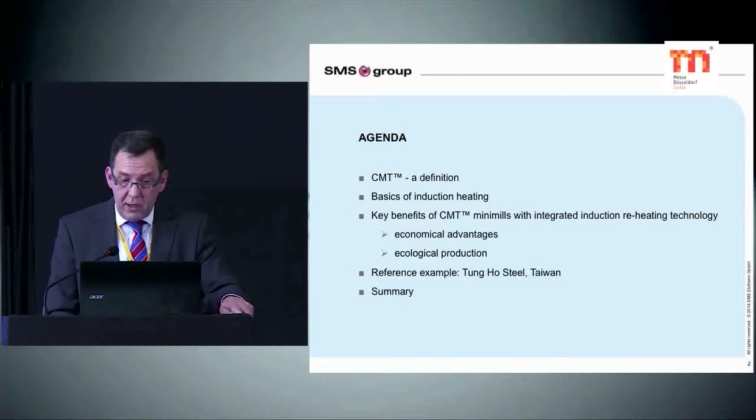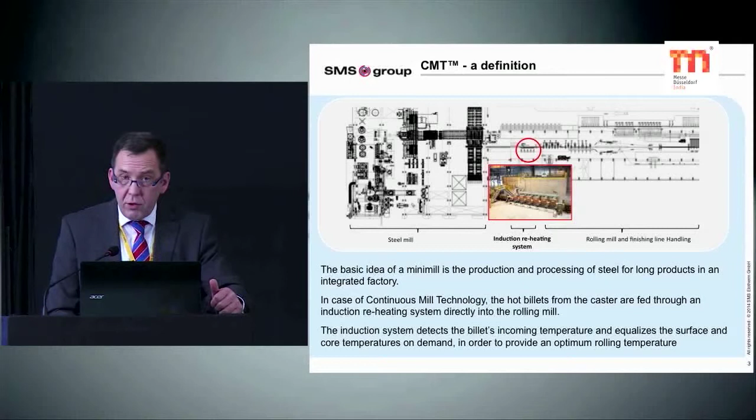So we have 6 euro cents per kilowatt hour for electricity in our case here, and 5 euro cents for natural gas per kilowatt hour. And we determined the rolling temperature at 1000 degrees centigrade, and that brings us energy cost savings of 3.5 euros per ton of the final product. But that is not the only effect.

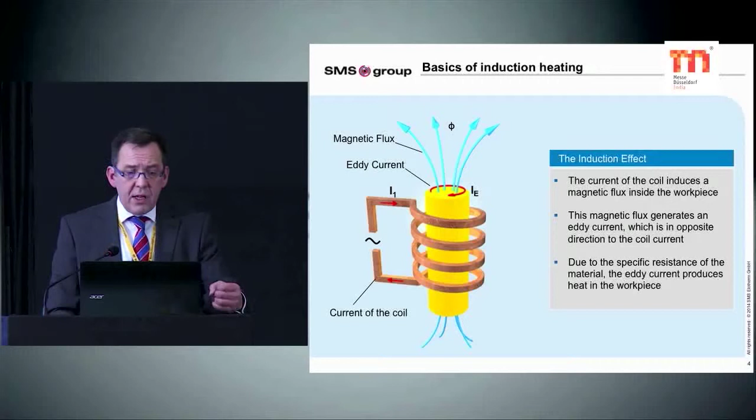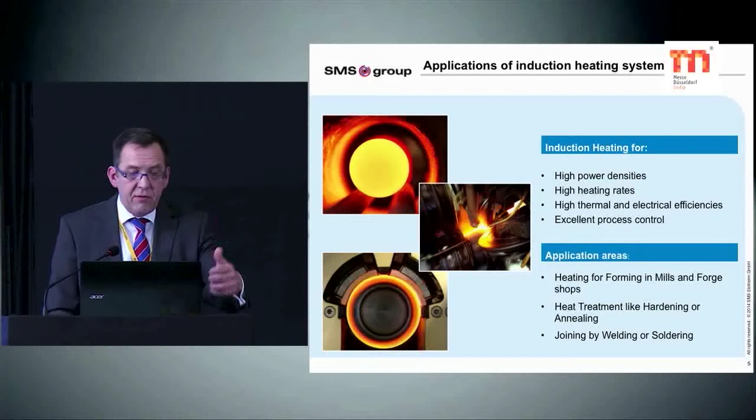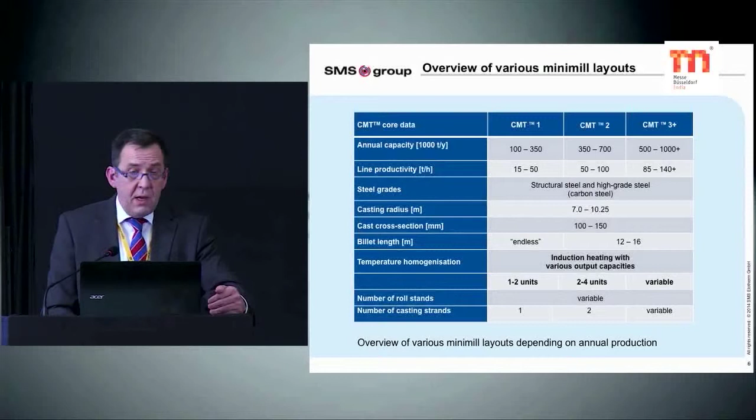We have another effect, which is a production increase, because with virtually no scale formation, don't take it precisely, there is always a little bit of scale formation, but substantially less compared to the combustion furnace. So that's why I said here virtually no scale formation. And we have here a number, a 0.6% increase of production just by the reduction of scale formation. Which means there is less scale, there is a higher input and higher output of your production.

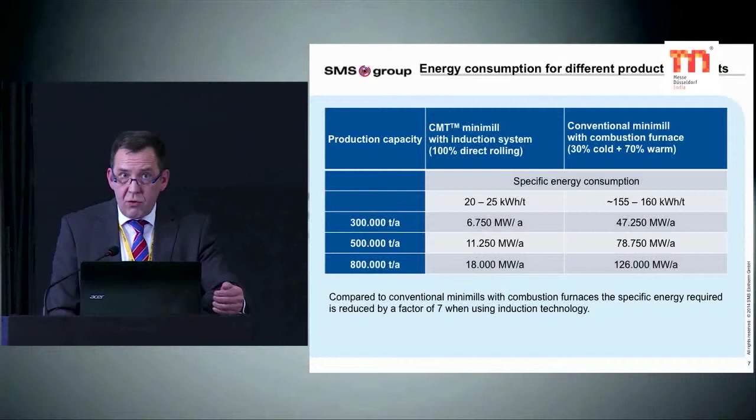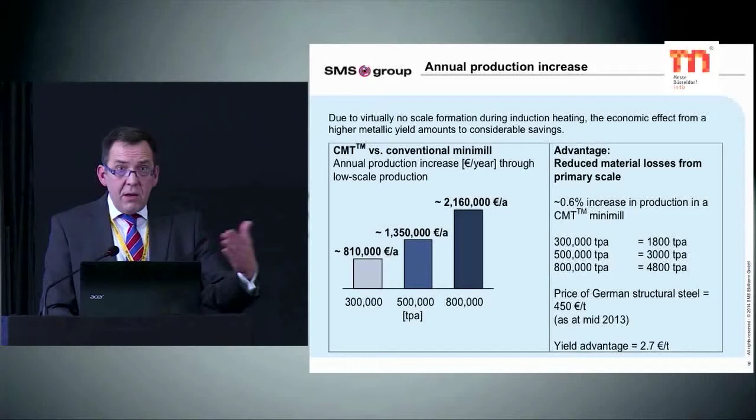And if you convert that again with the numbers which are true for the German structural steel market, and we talk about 450 euros per ton, the numbers come from 2013, so they are not that old, we have a yield advantage of almost 3 euros per ton. And depending on the energy prices, you can really add these numbers, and this gives some quite interesting results.

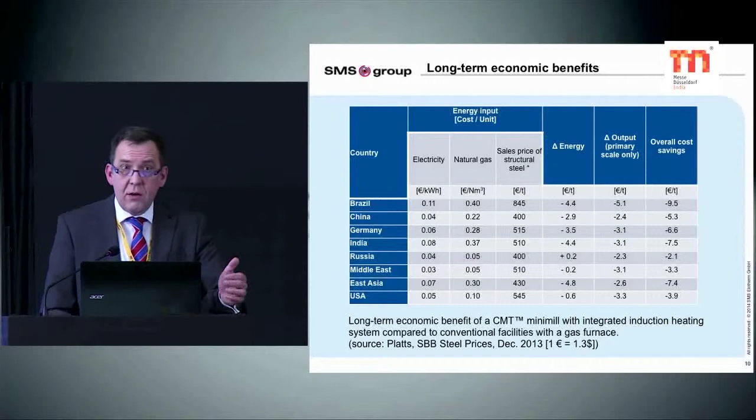I hope you can read it a little bit. The numbers are small, but as I said, handouts are available, so it will be possible to read all that with your colleagues in your companies.

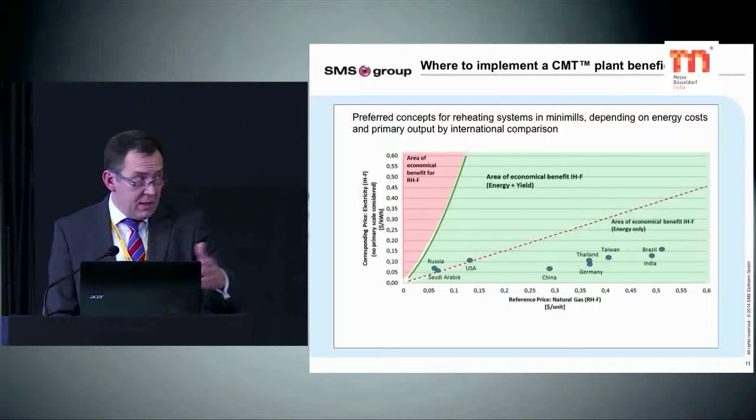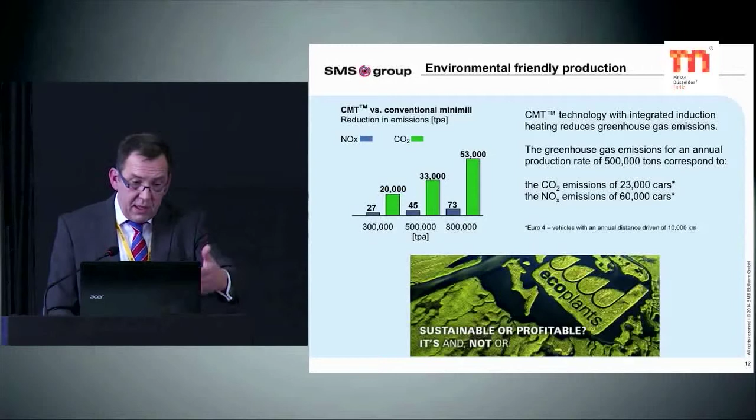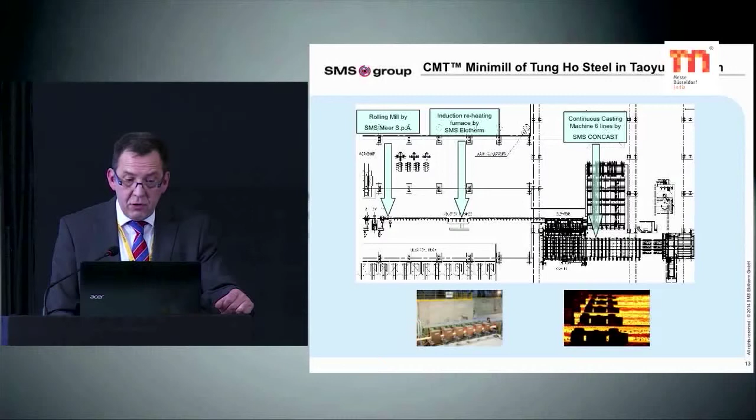The overall cost savings can be substantial. And the table we have here is based on numbers from the end of 2013, December 2013. We tried to put together all the numbers we got from the countries we mentioned here, be it natural gas prices, be it electricity prices for industrial consumers. And then, of course, the sales price for structural steel, which is also subject to very high fluctuation. But these are the details, which don't give you too much at one glance.

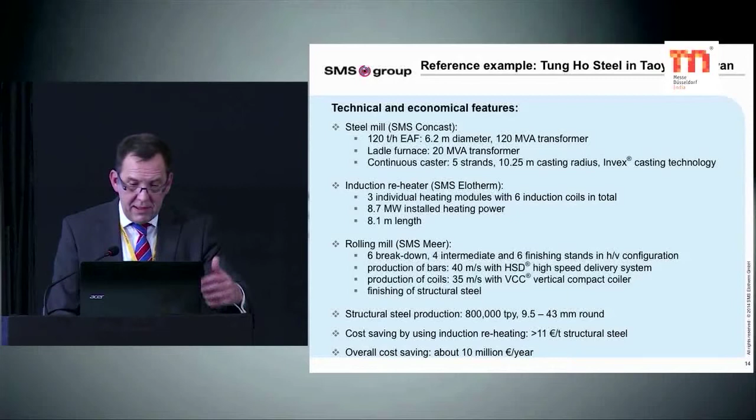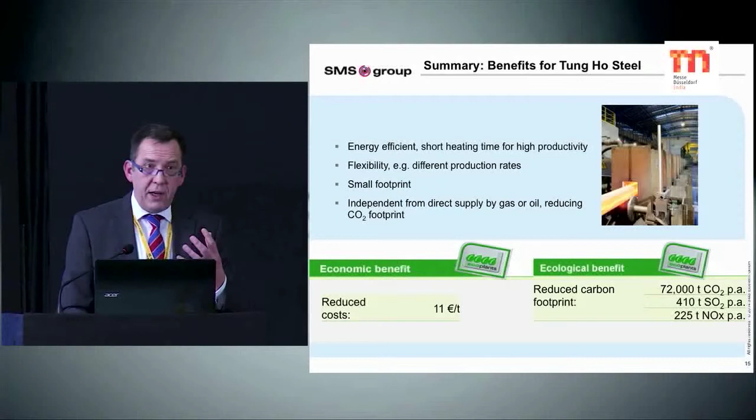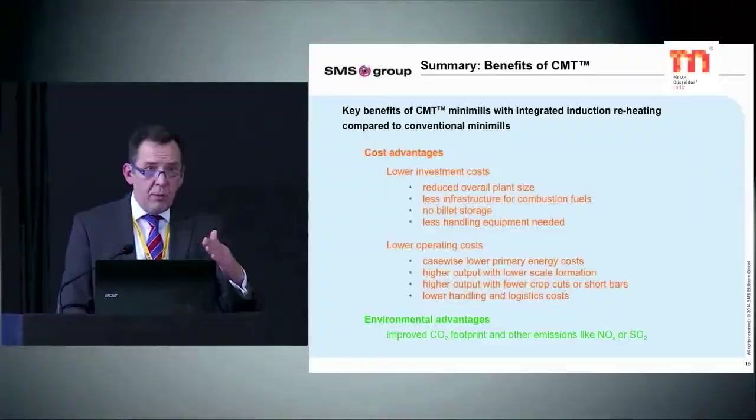On the next page, you can really see that there's almost no case where it is not worth at least talking about this alternative. I mean, there are situations with high electricity prices and low gas prices where it could be at the borderline. But normally, electricity prices and gas prices or oil prices are somewhat linked to each other, and according to what we experienced, in any case it's worthwhile looking into that and asking ourselves the question, could induction heating be a smart answer in the case given?

Okay, these were the hard facts with the euros or the dollars or the rupees, but there is another effect, which is the environmental friendliness of the production. I'm not really sure about the government in India, but I know that the governments in Germany and in Europe and also other countries start picking up more and more on industrial consumers, and I think they figured out that they are nice taxpayers which can pay a lot of extra taxes when CO2 emissions are getting imposed. So at least the states in most European countries found out this is a nice way of making more money. And I would be surprised if governments are not learning from each other quickly.

So the reference customer I'm going to show you in Taiwan was exactly driven by that, because the Taiwanese government found out that with CO2 emissions and NOx emissions, government can make a lot of money. So the industry was interested in reducing that, of course. And you can see here in our three categories, small, medium, and large size mini-mills, you can really save a substantial amount of CO2 and NOx emissions.